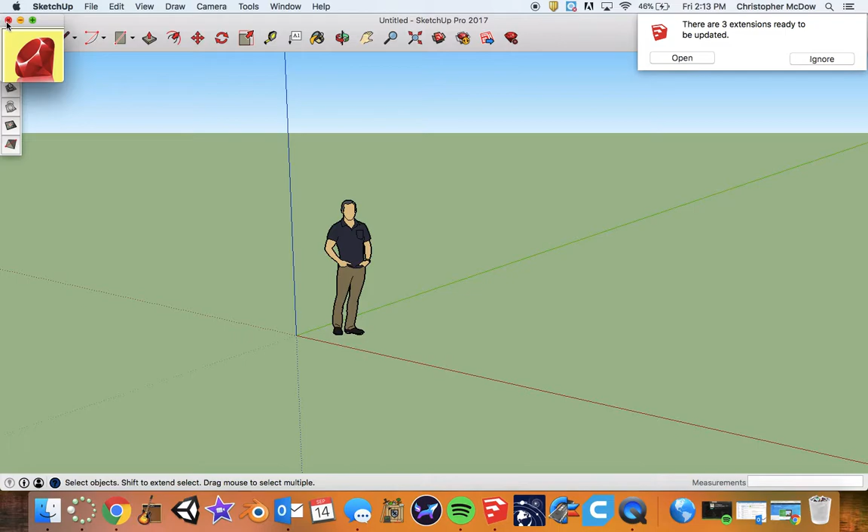If you don't have SketchUp located at the bottom of your desktop, hit Command Spacebar and start typing SketchUp, and you'll find it that way. This should pop up. When you first come in, hit Start Using SketchUp and it will load up for you. Mine may look a little different than yours—you might have a few extra tools here, but remind me later, I'm not gonna do those right now.

When you first come in, you'll have your SketchUp large menu up here, and these are some tools preset for you to use. Down here is your measurements—it tells you the distance, how big something is.

So let's just go through these really quick. File—the thing you're going to be using most is Save As. When you create a SketchUp project, I'd encourage you to save it as soon as you get in, save it constantly, save it to your desktop. So your desktop is this part of your Mac, so you can find it quickly. It's going to be known as a .skp file, or a SketchUp file.

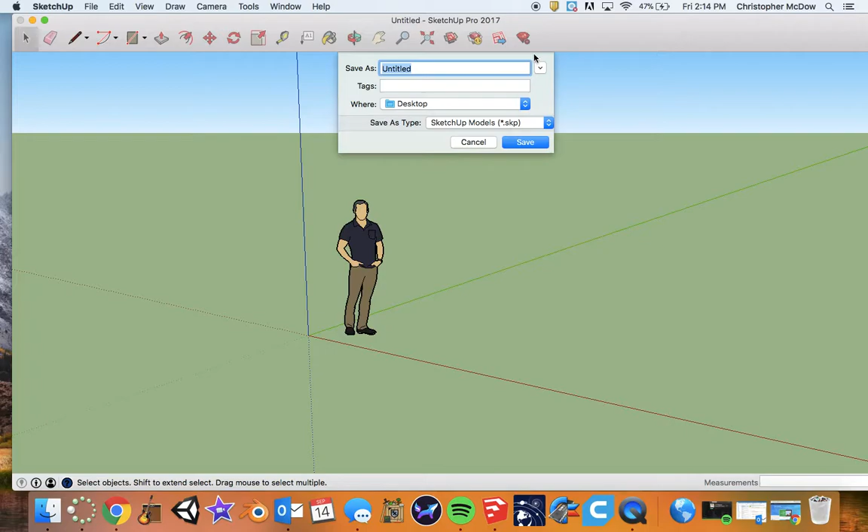That becomes important because if you want to do 3D printing, most 3D printers won't work on an SKP file—we'll have to change it. So I just want to point out that that's what it's going to be known as, and you'll see it over here as a .skp, instead of a PDF or PNG.

File also will have some things like your 3D Warehouse, which isn't going to be useful for most of you starting off.

Editing—these are the things that a lot of your hotkeys will do. So to undo something, you would normally do Command Z; to cut, copy, and paste, Command X, C, and V. For the most part, you won't be using tons of these menu items—you'll be using the hotkeys because you'll know how to use those.

View will be useful later on. I'll show you when we build our first little box how there are some things in here that can be really useful to you.

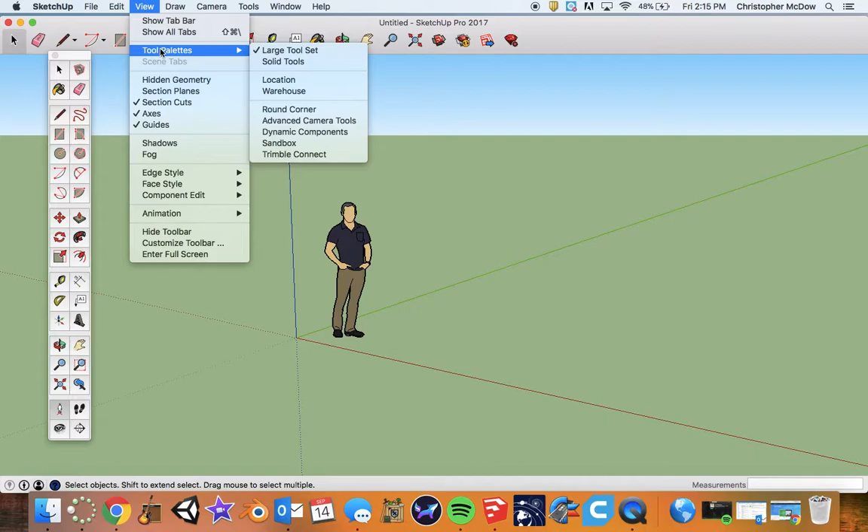But also here you'll have tool palettes, and you can go ahead and choose these tool sets. Now, you'll notice some of these things are already up here at the top—most of your tools are already available here. So if you feel like you can't find something you need, like the Follow Me tool or the 3D Text tool that you don't see up here, you can just go to View, Tool Palettes. And if you don't want to see it anymore, just click off of it and it'll go away.

Drawing—well, you won't use this very often. You'll have everything available here, but it'll let you choose how you want to draw your lines, freehand or a normal line. Camera can be useful later on—you'll be able to make tours, and this kind of thing will let you set scenes and stuff like that.

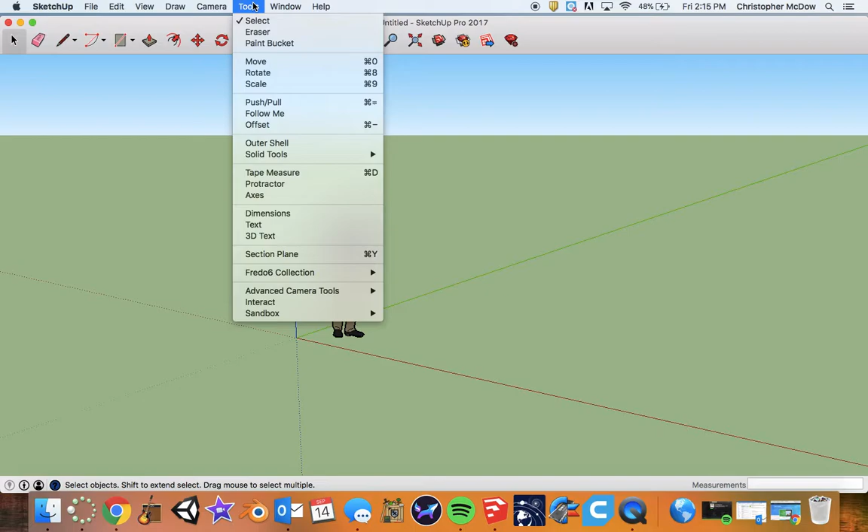Okay, all these tools, once again, are found here. Basically, you won't be using tons of this other than the saving, playing with your views, and then later on we'll look at face styles. So really basic kind of stuff.

Selection tool, eraser, drawing lines—you hold this down, and if it has a little arrow, just hold it down longer. Arcs, different types of arcs, different kinds of shapes, so squares, circles, push and pull tool.

So let's go start by drawing a rectangle—you can see what it is. This green line is an axis; this is typically what I would associate with your Y, so height, as in if this was 2D, this would be the height of something. Red would be sort of your X axis, and then blue is what we would call Z, or in a traditional sense, like your height when you're standing up.

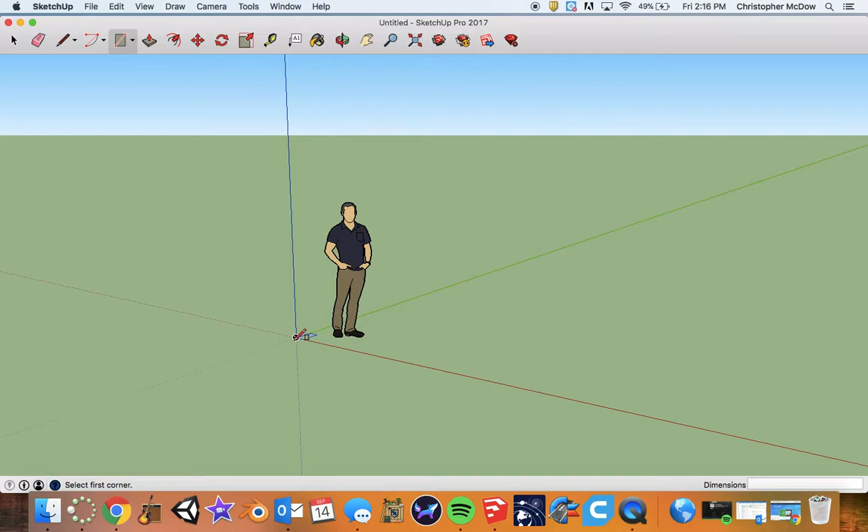You're on an axis right now. I know that he's on the correct axis. You see this line's red, and this is green, and so on.

So I draw that. If I want to make this pull up, I would use the push-pull tool. I'm going to pull this up like this. This button right here, if you hover over something, it will show you what it is.

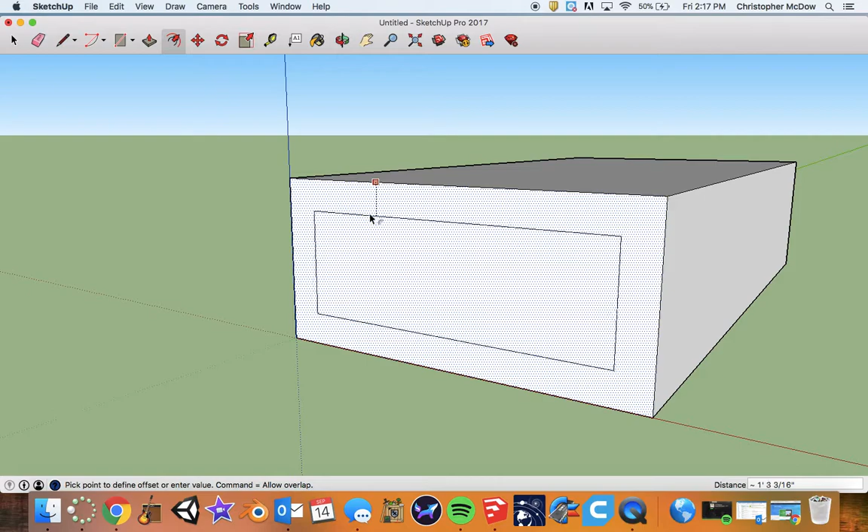This is your offset tool. You'll use this sometimes to create an offset, or a box that's a certain distance away from the outside.

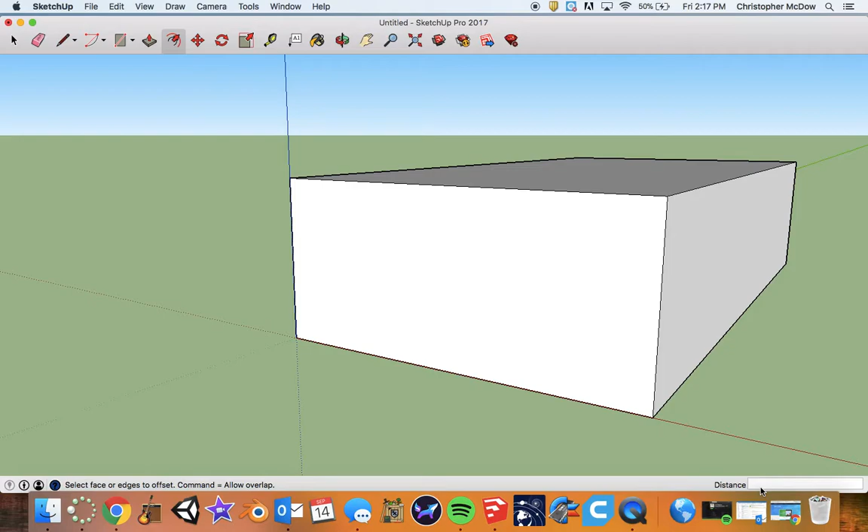Command Z if I wanted to undo that. If I click on it and then type in 4 feet and hit return, well, it went way too far. Let's try that again. Oh man, I'm just messing up. Amateur, amateur. Yeah, 4 is too much. Let's just do like that.

You can type in the dimensions that you want that way.

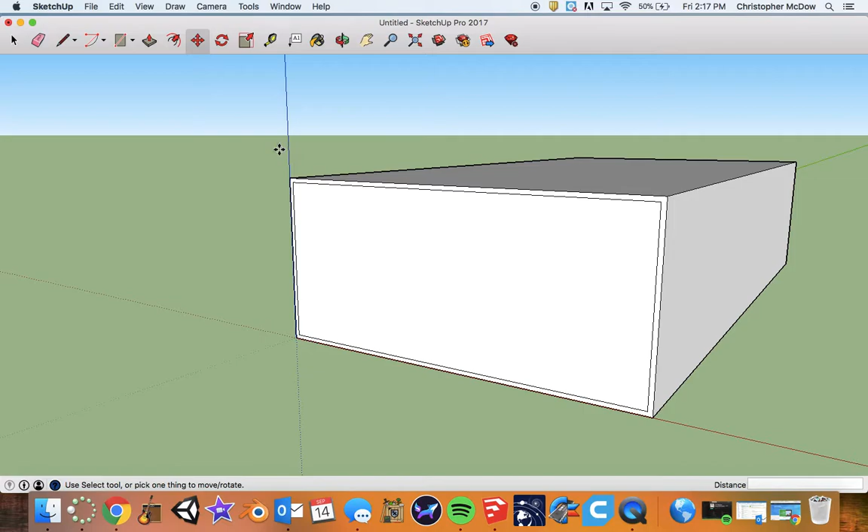Right here's your move tool. So you can select parts and move them around, or whole objects. Make sure you click.

Right here's rotate. This right here is rotating. Rotating can be really frustrating. You can click on it and then determine how many degrees of rotation you want, like this.

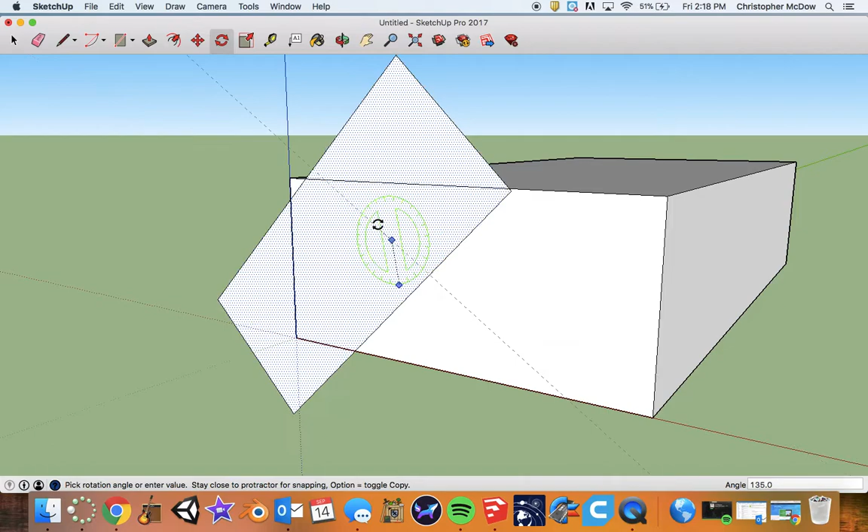This will be more useful when you start adding objects in, like pieces of furniture.

Scale is to change the overall scale of something. So it gives you these handles, and you can condense or stretch those things.

The tape measure is very useful. You click on one point, you click on the other point. On the bottom it says length, but you can see the little tagline that tells you this is 6 feet 9 inches and 9/16. So a little bit taller than the guy standing on the side here. Then you can click off again.

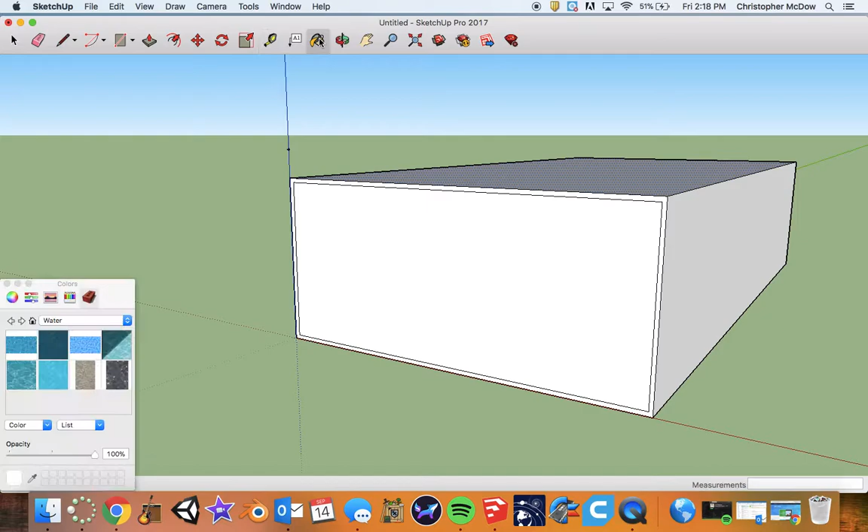You can add labels. You can paint. When you come in here, you can choose to do solid colors.

You can also choose materials, like water, and there's all these other things in here like brick, you know, like that style there, this type of brick. So there's just a whole bunch.

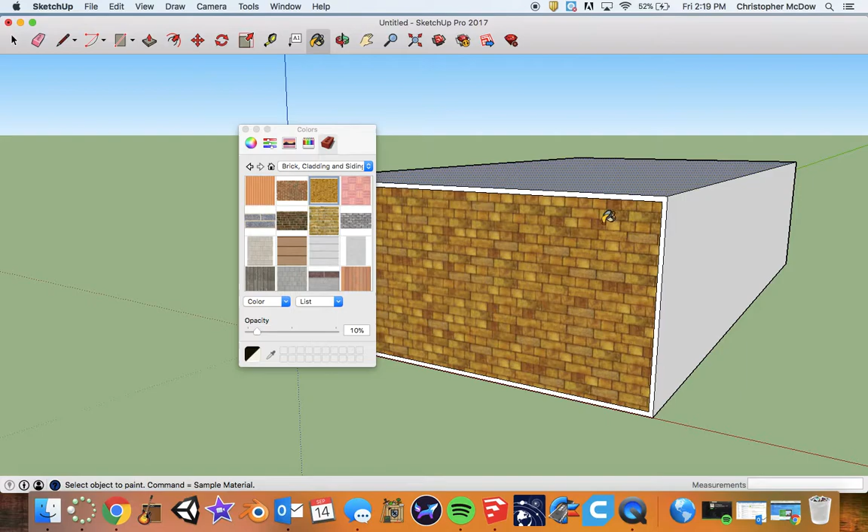Also opacity. This is sort of seen like a wrap, like a piece of paper on top of it, so you can get rid of the opacity, which is how transparent something is. You can reduce it and see through it better, but because there's a white thing behind it, you can't really see a whole much there.

We also have the orbit tool, which is a camera tool, which is very useful. With your Mac trackpad, you can pinch. You can do a lot of this stuff without using the orbit tool, but this is to move the camera concisely, this little hand. Of course, you have your zooms.

This is zoom to extents, which means put the whole object lined up perfectly in the middle of the screen. So if you're working on something and you scroll off, you can click that to go find it.

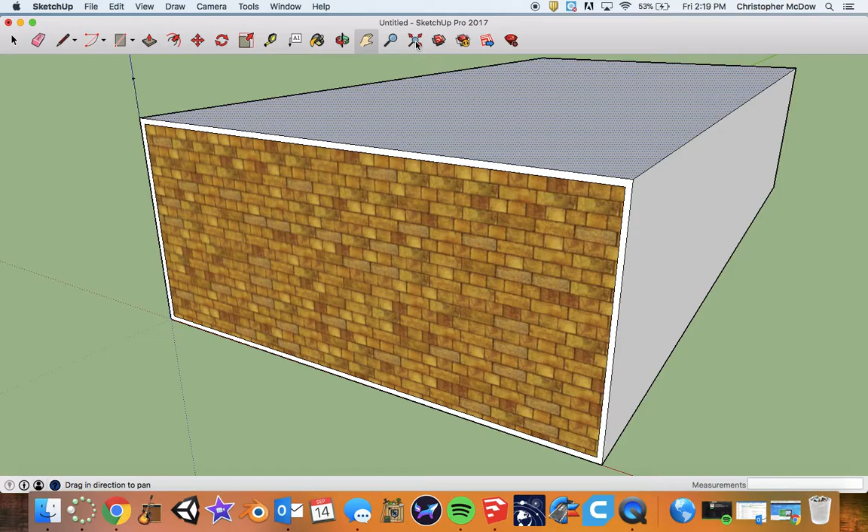Later on, you're going to need to find a way to your 3D warehouse to find particular objects, so maybe like a slide or something like that. This is where people put on objects that they've made.

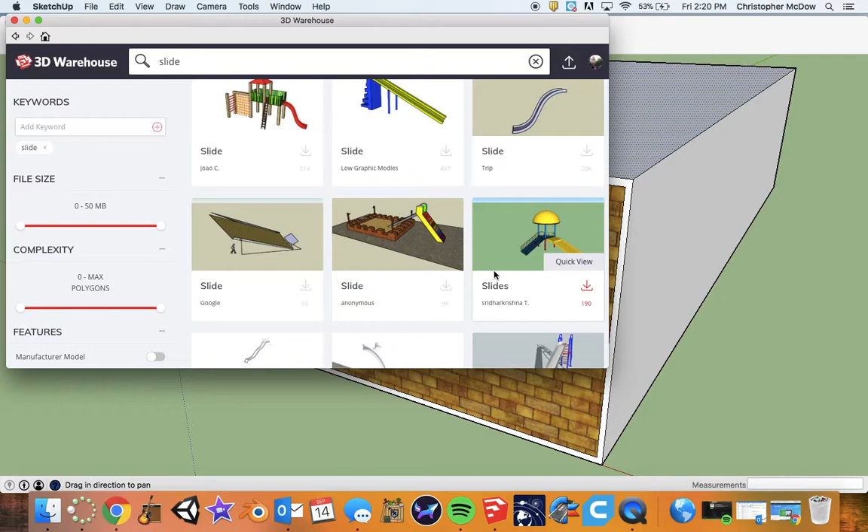The temptation for some of you guys will be just to go here and grab stuff. Obviously, that's not what I'm intending for you to do. I want you to learn how to build stuff on your own. And you can see some things are not well built either, and they won't necessarily fit what you have. But you can find a lot of useful things in here.

And that's really the key to SketchUp, is knowing how to use these basic tools. The way SketchUp sees things is almost like origami or folded papers. These walls have no thickness. It doesn't understand thickness, it just understands corners and edges, and from that you can build some really incredible things.

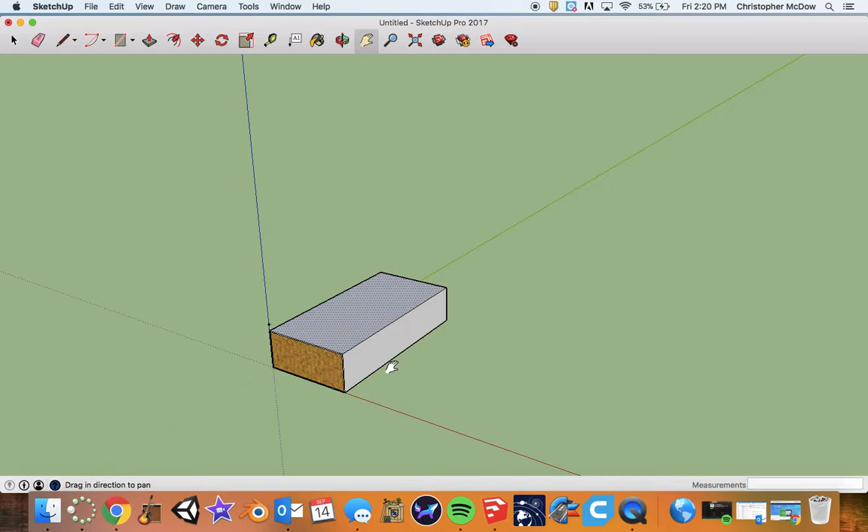This should cover most of the basic stuff for SketchUp. So let me know if you have any questions.